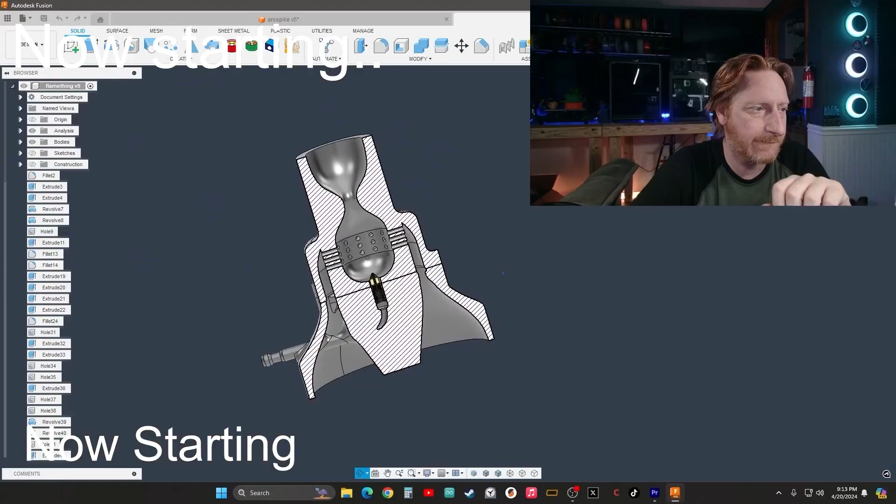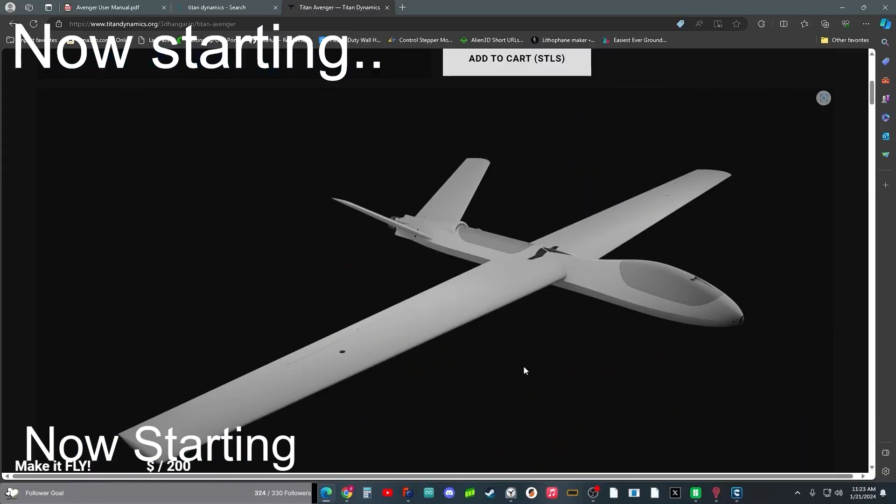Nozzle heats up and the plastic it flows, a creation takes form as the live stream goes. Heart of a maker with a tech-savvy show, designs in the making, see the hotbed aglow. It's shenanigans 3D on the digital stage, with each layer printed, he's the maker, the mage. Let's start the show, layer by layer we watch it grow, a twitch in time with shenanigans flow, chaos reigns with a fiery glow. Watch closely as the filament spins, a wild ride where the line between fails and wins. Accidental art when the plastic rebels, shenanigans 3D, he's breaking all the levels on the edge of tech, where the sparks may fly in the streamer's den, there's no limit to the sky. Every stream's a gamble, roll the fiery dice, pushing limits, bending rules, not one to think twice. Heartbeat pulses with each print he creates, while the chat's wild wonder in suspense they wait. Rising with the flames in the shenanigans game, printing out the future, no two prints the same.

We need fire, we need fire. I was watching the intro there, and I'm like, you know what, we haven't had fire for a while. We'll work on some fire, we'll try to get some fire for next weekend.

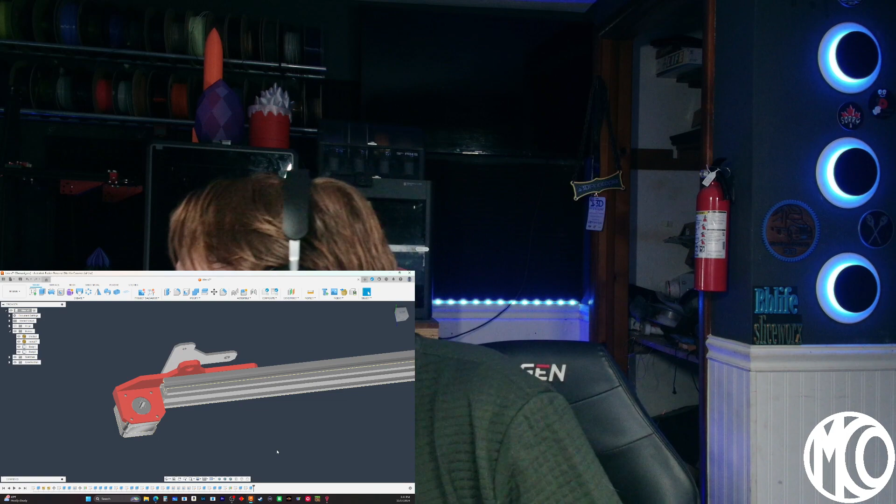That's gonna be the tricky part. So I know we can mount the one on the rail, but the other one is going to have to be a 3D printed adapter to mount to this. So that's something we're going to be working on during the week. I figured we'll work on the printer, do the printer stuff during the week.

Some point this week, we're going to check out the new flight simulator. That is coming out in a day or two. I think it might be out tomorrow, or it might be released Tuesday. I already downloaded it, I can't play it, but I already have it downloaded for the pre-release. So it's already downloaded, it's just not, I can't play it yet until they turn it on.

We're going to explore the new farming simulator. I'll do that sometime during the week too. But in the meantime, I want to design something. I don't know.

Your P1S is still down.

Oh, you have Hellbeast, you have a join at Formnext. Oh my God, I'd love to do a Formnext. I really would love to do a Formnext. They were supposed to do one here in April out in Chicago that we were tossing around the idea of going, and then it got canceled.

Yeah, hybrid, you know, I think the same thing too. It's like every time you get your hands on a printer, something happens. Something happens and it's like it breaks on you. Messed up the filament cutter sensor when it installed a new hot end.

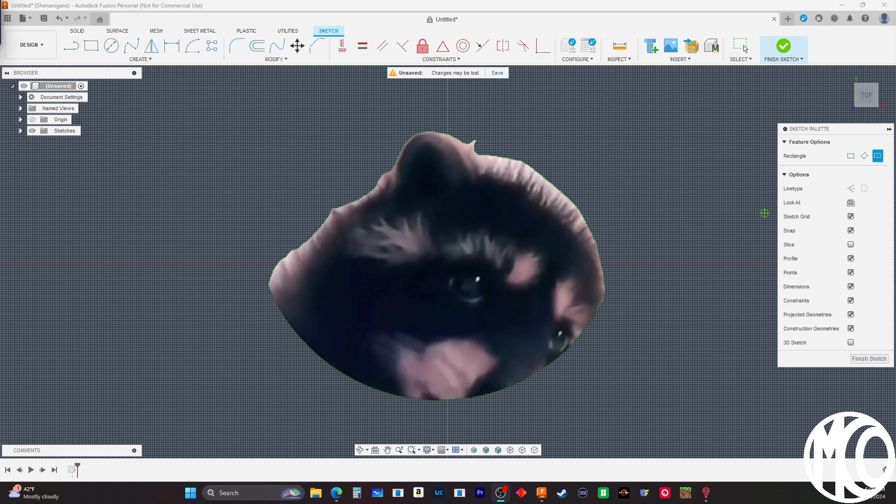Very intelligent and can solve problems and remember tasks for up to 3 years.

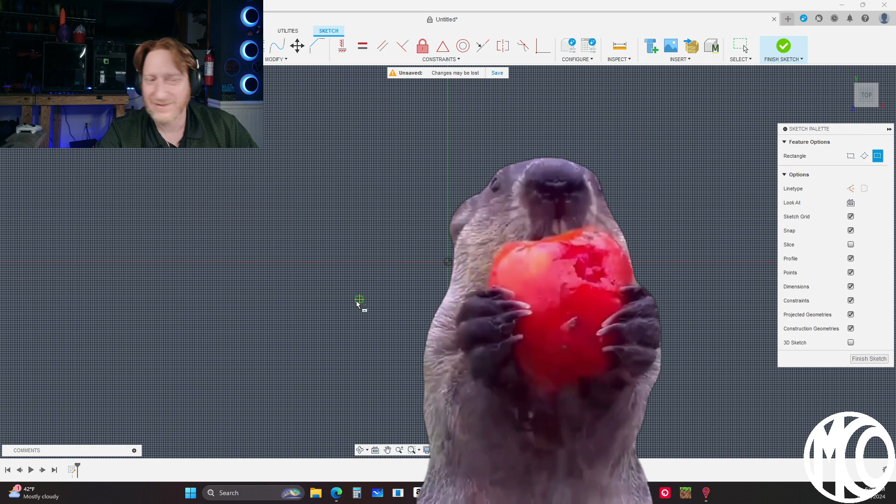That reminds me of the time we said Tech Cheaper is wearing headphones. I think because he made a comment about headphones, and we set off that little air raid siren. Yeah, I came across that Twitter the other, not Twitch, Twitter, TikTok video the other day.

So, what are the measurements on this again? For some reason, I think there already is a 55 by. I think there already is a card out for Santa. I'd have to double check. 55 by 90s. We're going to do it.

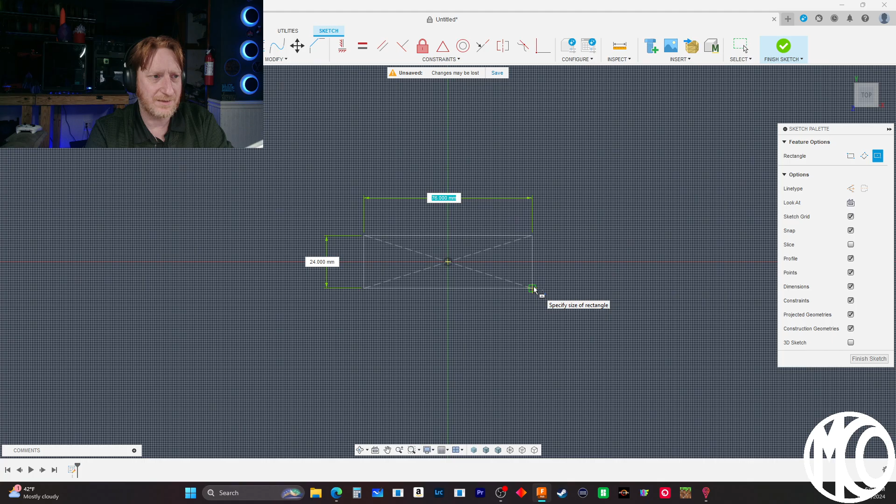590. And let's round off these corners. Oh, wait a minute here. Let's make this 54. I'm making this 54 because see how that is right there? I don't like that, that's just going to drive me absolute bonkers. So we'll make this 54.

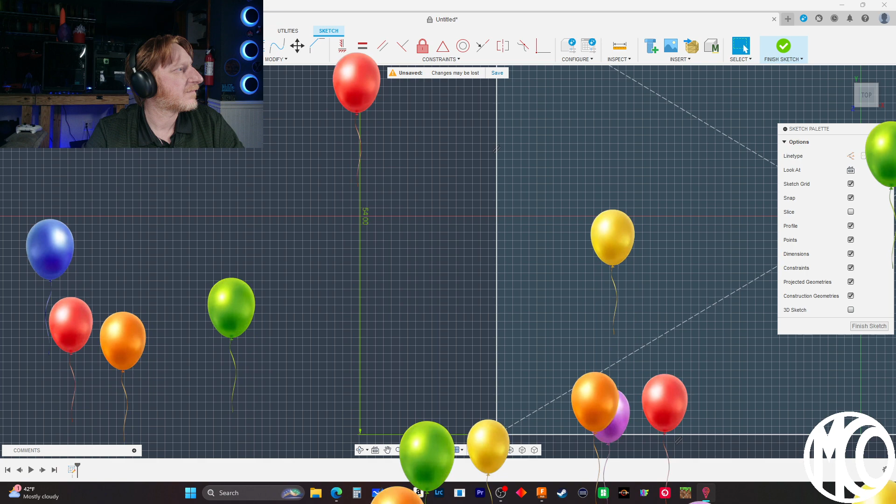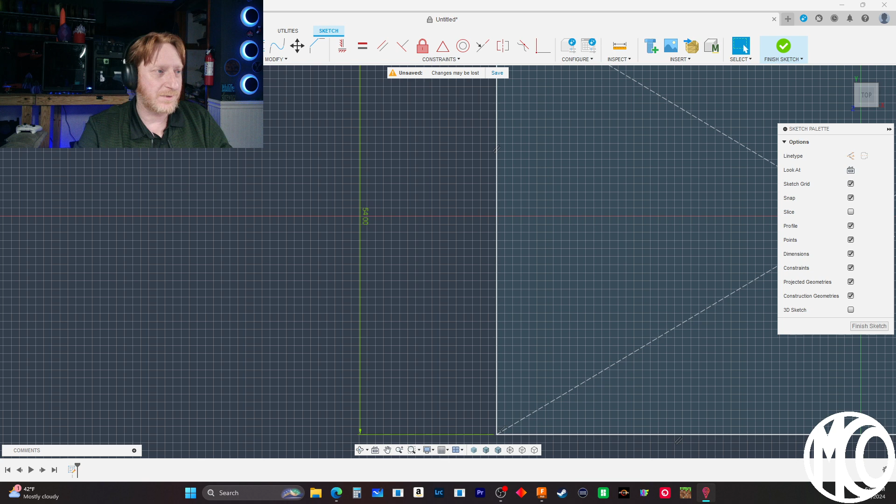That one was not supposed to be available to you, but somehow, nope. I accidentally left that one open for you. So yeah, that is not supposed to be a redemption for y'all. That is for my button down here at the Stream Deck, for when I find out it's somebody's birthday. I can press this button right here and activate it, which we already did.

We did it for the Forest. I can't remember her full Twitch name, something Forest. And I discovered that one is not a repeat, it's just a very long one. I didn't realize how long it was. Okay.

I just thought of something. What if we turn this? What if we turn one of these? Because of those noises.

Directly around corners. What? Apps with T, maybe Tinder? What are you talking about? Oh, Tinder.

So, a few months ago, I was playing around with Tinder. I had a little too many adult beverages that night. I was playing around with Tinder, and I completely forgot I did that. And I got a whole bunch of notifications the other day. I was like, what the heck is this? Oh boy, so I deleted that account.

It's like 4 millimeters. That will work.

Some of the things you get, some of the things you do, some things I do when I get a little too happy, when we get the wobbly pop.

There goes my crazy dogs again. I did something bad here, and I'm not sure what I did.

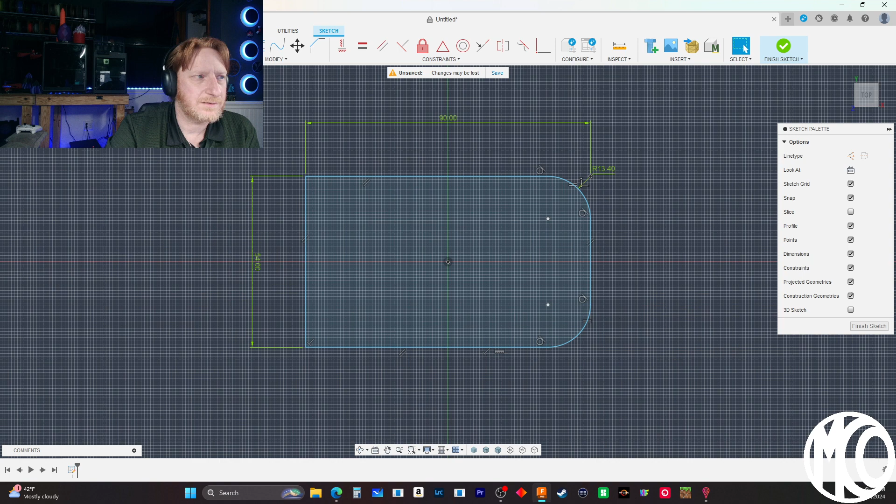Oh, I finished the sketch out, that's what I did. Because I want to use this. We're going to go on the inside, about 2 millimeters, I think would be ideal. Yeah, 2 millimeters, we'll go 2 mils.

You swipe right. Yeah. If you, I still have the app on here. Let's see what happens if I swipe. You said swipe what? I do have a blue sky.

I have to, it's all, I have to link it all. What happens if you swipe? It's a super like. If you swipe up, it's a super like. If you swipe down, it does not. It opens up their thing and accidentally super likes that person that's like 10 miles away from me.

I accidentally... yeah, we'll just put that back there.

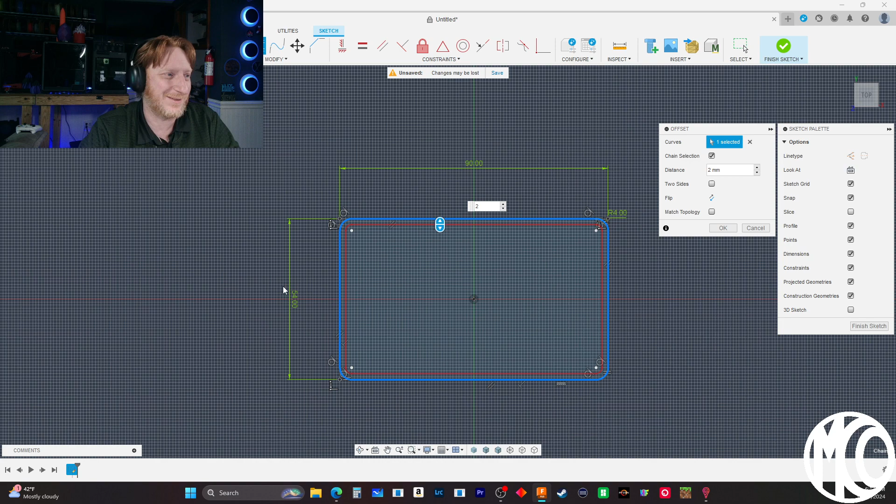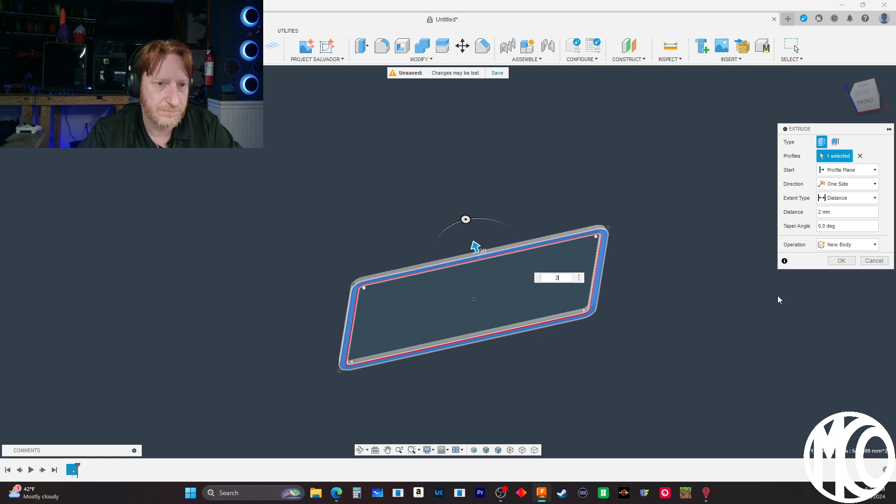All right, well I don't even know what we're doing in here. 2 millimeters. So that is our frame. Oh, I'm missing a gas can on here. Well, that's all right.

Yeah, I have a TikTok account. Twitch is my main platform. It used to be YouTube. YouTube was my main platform, but I just don't have the time to edit, so I switched everything over to Twitch. Twitch is my main platform, this is where you'll find me. I store all my Twitch VODs on YouTube. I do need to get back into doing some YouTube, I'll do a YouTube video here and there. And TikTok is just a fun thing. I can't remember the last time I did a TikTok video, but I'll be sitting here bored and all of a sudden I'll do a random TikTok video.

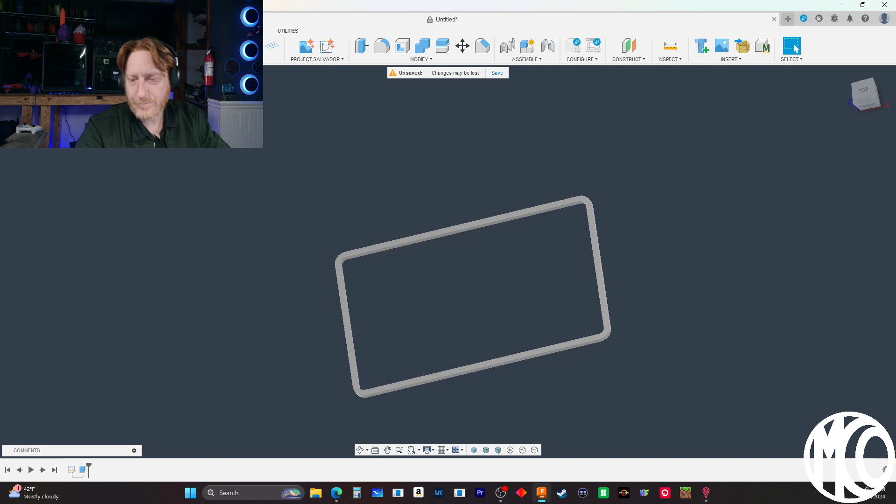Anyone use AliExpress? I ordered from AliExpress years ago, got my Christmas lights from them, but I haven't ordered on there for a while.

All right, so this is our main frame. It's gonna be about that size right there. So we need to do a Santa sleigh.

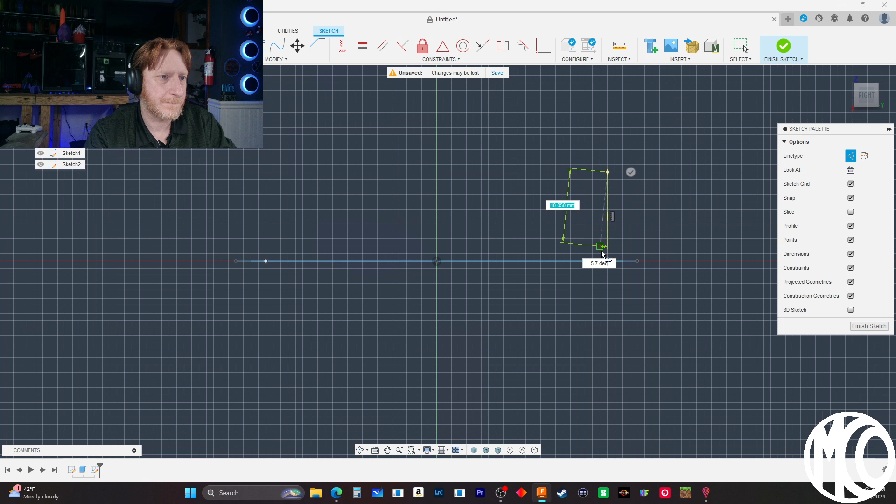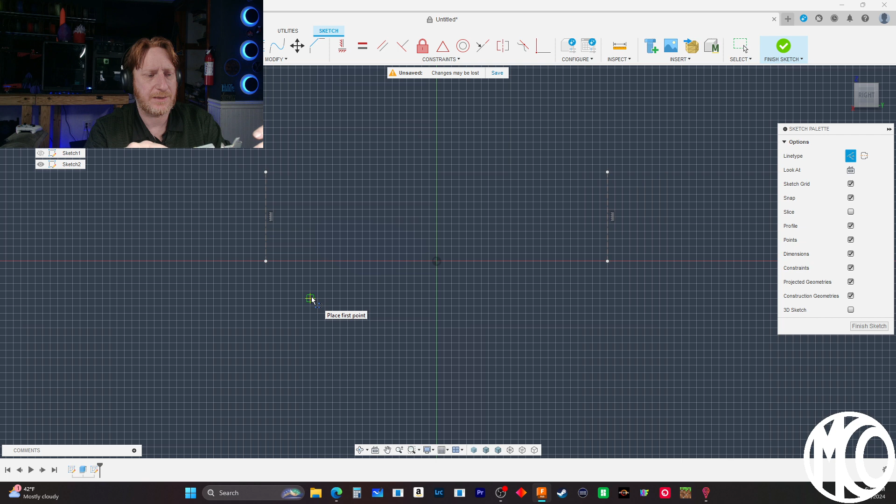How, you know, I guess we can start here. Let's get some dimensions in here. That's 12 millimeters. So that's 12 millimeters high. How high is this guy right here? That's 10, so we probably want that to be... we're gonna do something like 40s, in the 40s, and by 30 — you probably want to do at least 40 by 30. We got to think about how this is going to print.

You like to support Chinese people? I like to support everybody.

Yeah, I just haven't really played around with it too much. I'll get stuff from time to time.

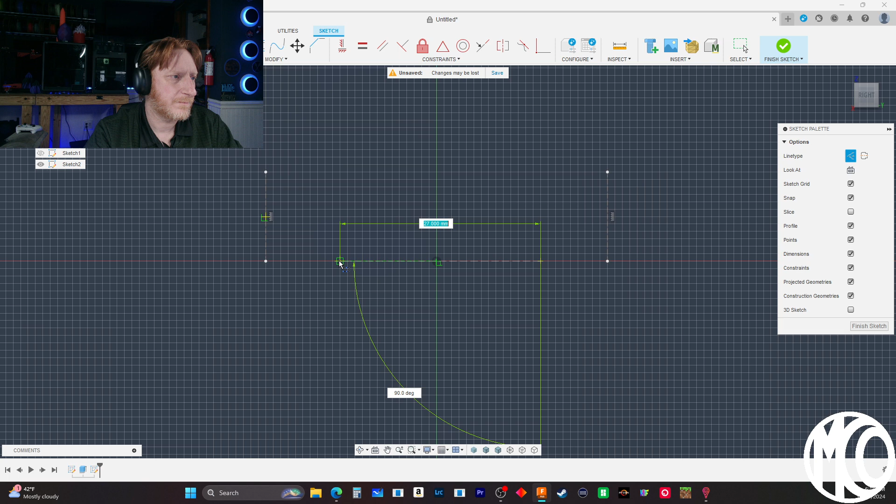We gotta think about it, I'm picturing how this is gonna print. So we're gonna print the sleigh upwards like how this is, but we got to make sure that we print it with very, very little supports. I don't think we want to be printing supports on this. So if we do something like this, and then let's bring...

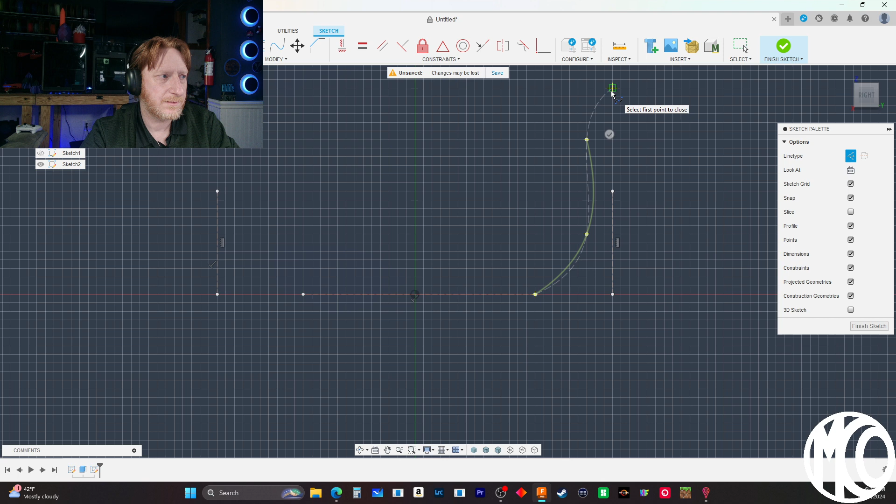You gotta understand, I know there's plenty of designers out there that fully understand what I'm talking about, that you got to be mindful of people that don't have top-notch machines. I shouldn't say top-notch machines — what's a top-notch machine? A machine that works, right?

When I design something, when I make something, my whole thing, like this tree here, the whole thing is I like to make stuff where it's accessible for everybody to print. That's why you don't see me doing multicolor prints. Or if I would do something like that, I'd make an option available, like look at the stuff that Build-A-Robot makes — that can be printed on a very simple machine, or you can go and have it as a multicolor print, right?

No, their models — him and his wife — the models that they make are very, very flexible. And no pun intended, yes they are flexible, but the machines that you can print their models on are very, very flexible too. And that's the way I like to keep my stuff.

When I try to do something like that... because I don't publish anything. That's gonna change though.

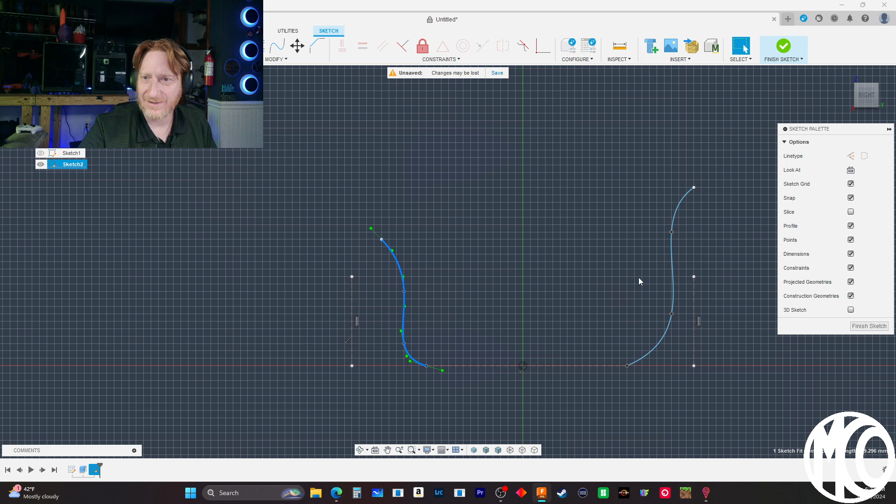Oh, I'm sorry to hear that. What? Oh, that is crazy. I hope your son's... I'm sorry for your mother. Yeah. And I hope your son is a lot better. You know, your other son does pop in. Oh, my heart goes out to you. You'll definitely be in my prayers. You've always been in my prayers.

In the patient program now. All right, good. Yeah.

Craziness, right? All within 2 weeks. I would definitely say October was a shit show. Definitely, I would say that. I couldn't even imagine, I can't even imagine the loss of one of my parents. That would be devastating to me. And something happening to my son, to my child, that would completely devastate me as well. That's crazy. I know the feeling about the child, I know that for a fact. 3 months after my son was born, we weren't sure he was going to survive the trip to the hospital. So yeah, that was a nightmare for that first year of him. But yeah, loss of a parent. Ooh. But hopefully it will turn. You can't replace something like that, but hopefully it gets turned around on you.

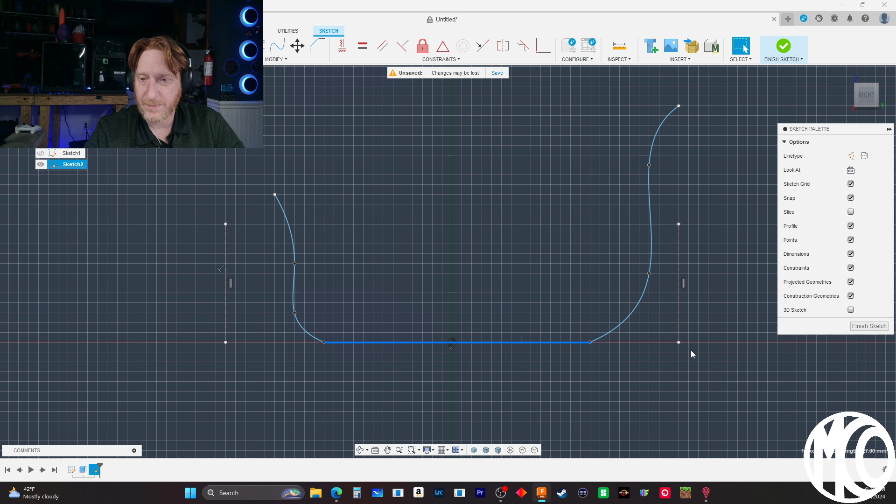Dad has 2 kinds of cancers. You're preparing for him, I'm sorry. You made your peace. Yeah. My son's been talking a lot lately about stuff like that, and I just tell him it's part of life. You know, you live it, you live your fullest.

Kidneys and liver were failing. Well, it was just antifreeze. My God, that stuff is - I watched a thing about antifreeze, how toxic that stuff was. And you know, I'm an old school mechanic, I guess, or not an official mechanic, but I grew up in the backwoods on farms and stuff, and we weren't protected. Heck, just about 2 years ago - was it 2 years ago? Yeah, something like that - I had an antifreeze line break on me, and I was underneath my truck trying to fix my hose, and I was completely covered in antifreeze from head to toe. My clothes were saturated in antifreeze, and I just continued working the rest of the day like that. That stuff absorbs into your skin and everything else - maybe that's why I'm so messed up in the head sometimes, I can't think straight. I was always taught on the farm, if your hands are greasy, you went over to the gas can and poured a little gas on your hands to wash them with gas.

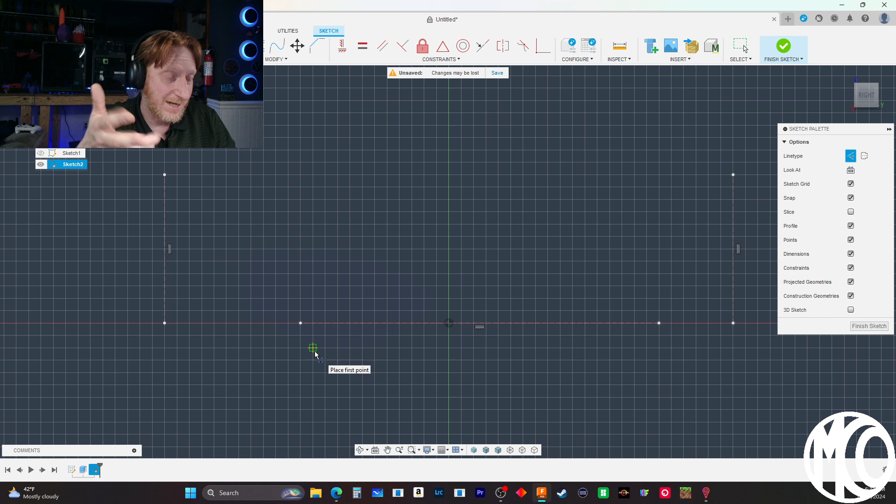Oh yes, that definitely would be a relief. Three strokes, holy moly. My mother was telling me that she was researching strokes the other day because she said she was laying in bed and kept seeing flashes of white. She freaked out and started reading about it, and my mother is the kind of person where, well, if you die, you die, it's your time. She's all about that, she's that kind of person.

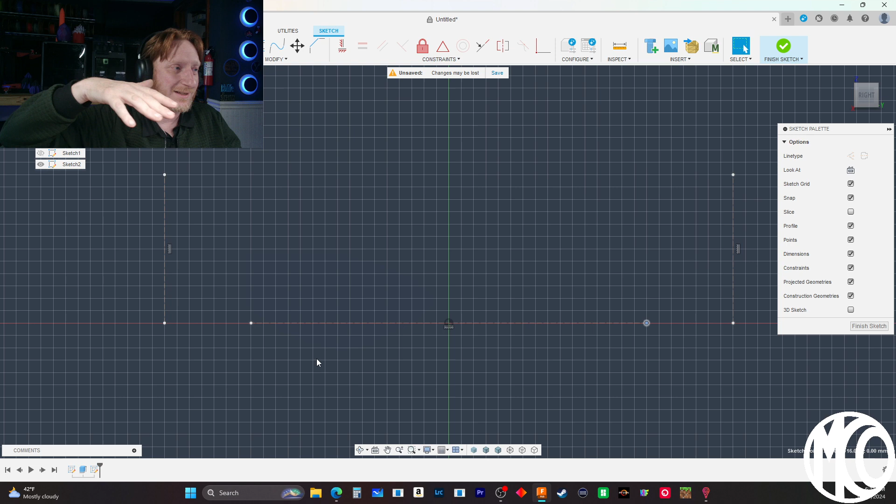But it turns out she had her phone notification for Messenger on, where the flashlight would light up, and her phone would be sitting on the nightstand. Every time my sister or I would send her a message at night, it would light up the whole room, and she thought she was having strokes, but it was just her kids. I was just like, wow, yeah.

You purchased a commercial laser. I really want a laser. You did that when you had a work phone. I would so love to have a laser.

I thought about making my own, with some of the extruded parts I have. I thought about making my own.

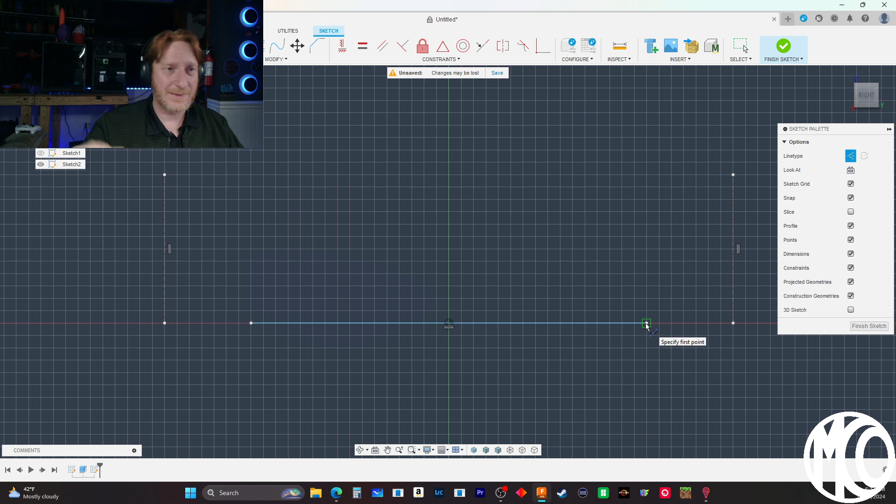I'm not really sure why this still keeps... oh crap, I deleted it. Overhangs, that's what I was talking about.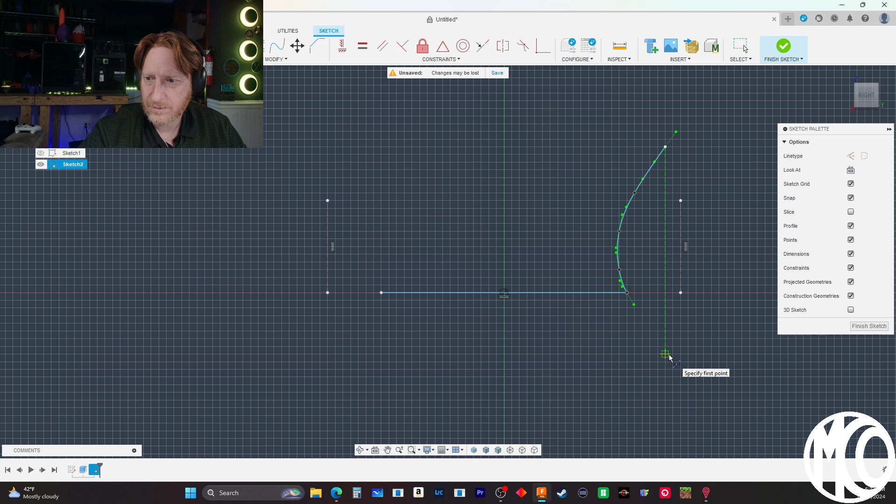I have the F1 already, I got the... Oh, you got a CO2 one. I can send you the focus one if you want. What? Send me the one you have? That one, to the stream? That would be awesome, I could definitely use that on the stream.

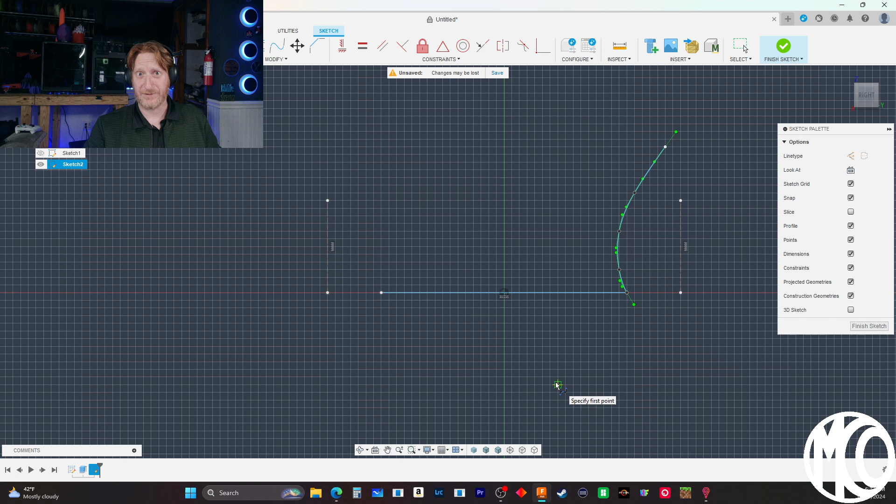Oh, subsector, I got myself a CNC machine. Yeah, check this out, we've been doing some upgrades here to the channel. Let me pull this out here real quick.

Yeah, so I picked up a CNC that we are converting at first to a 4-axis, and then it will be converted to a 5-axis. We've already used it, or well, we played around with it. It's nothing fancy.

Oh, and the IDEX, the one that I had to purchase because of you. Yes, I do, I remember that. The IDEX is currently down here beside me, but that runs Klipper now. Yeah, the one that you bought and then showed off, I'm like, oh, I gotta have that now. Yeah, so I blame you for that, for me having that one.

Yeah, that's sitting down right here. It's down here because we're doing some crazy stuff. The CRM4, that large printer that I have from Creality, they call it their industrial printer, that hasn't worked for like a year. So I got tired of dealing with it.

So we're converting it to an IDEX. We've actually been working on that this week. You have the 8 now. I like the 8. So yeah, we just got the extruded aluminum in, this came in on Friday or Saturday. Friday. So this is the new bar.

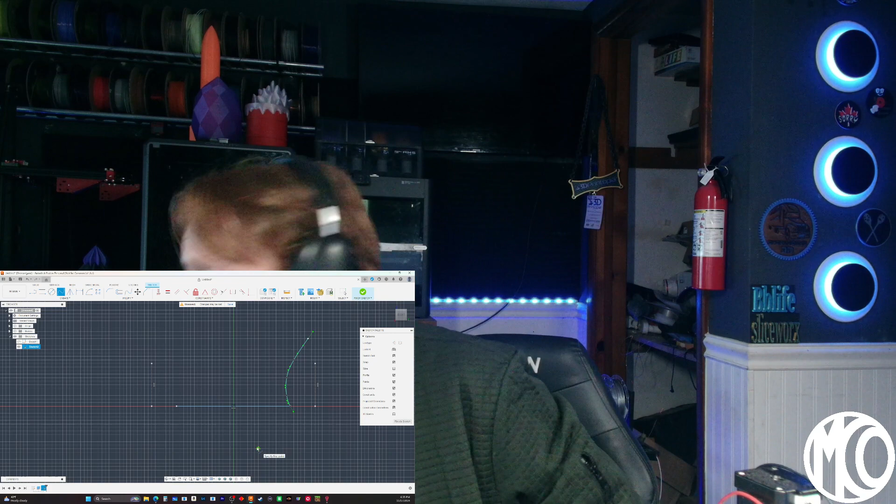We are converting the Creality CRM4 to an IDEX. We have the board for it already. We are going to be using the... I'm so happy that you popped in here, because you and I think the same. So we got the board. This is the board that's going to be going on the new IDEX that we're building.

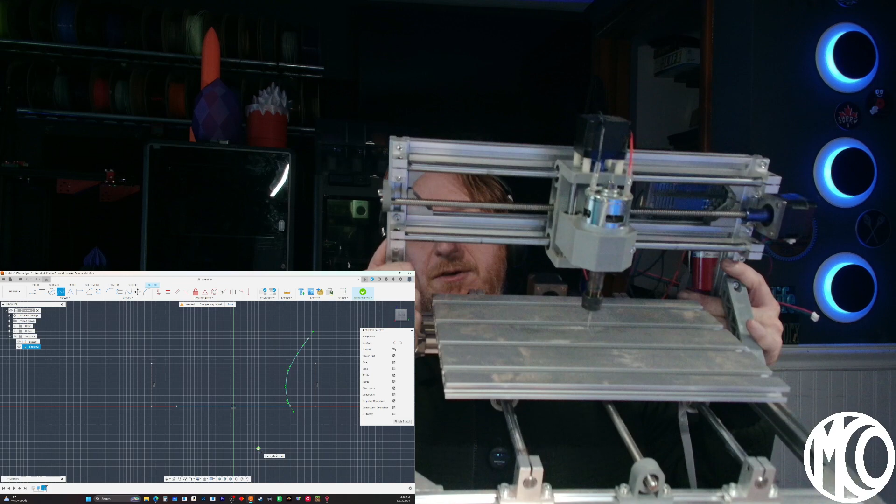And then the CNC that we got for the channel, this guy right here, nothing fancy. I went with this model, one, because it was cheap, I only paid like 160 total for this. But I went with this particular model because all the extruded aluminum... it's all extruded aluminum.

You see all the other ones that are under 200 bucks, all have that side plate on it. This one's all extruded aluminum, so we can highly modify this, and this will eventually become a 5-axis router or CNC mill. We put this together on a stream, it wasn't too bad, it does work. The only reason why we really haven't done much with it is because I've got to learn CAM.

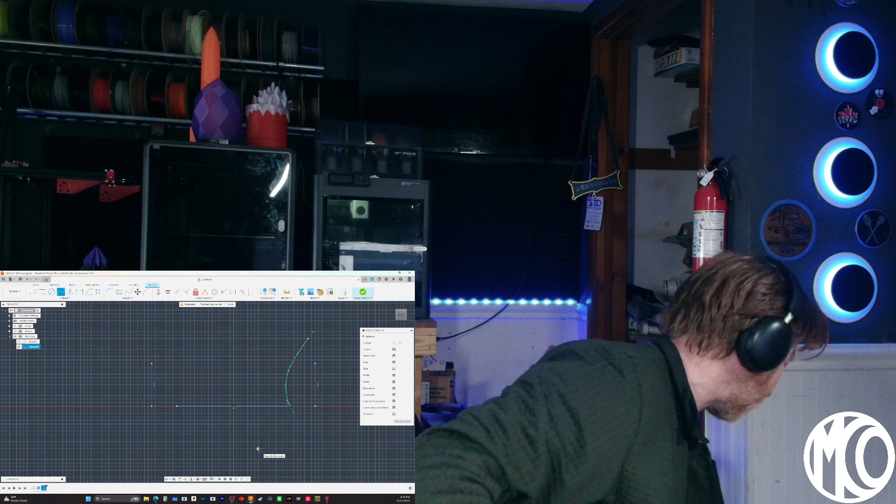We have printed stuff with it, or not printed. We have cut some things out with it. Let me get my light on here.

Do I have that over here? I might not, I might have. Oh yeah, I do have one of them. This was our very first thing we cut with. Oh no, this is our second thing we cut with. The first thing we cut out was just a star. So yeah, this is our second thing that we cut, it's just my son's name and a train right here.

And we did cut aluminum with it. We cut a star out of some 6061 aluminum. So we are capable of doing all that.

Same reason you have? Yeah, I played around. I tried playing around with CAM, and it's not clicking. But we'll get there, we will get there. And the other thing I've been playing around with lately, going back to Blender again, playing around with Blender.

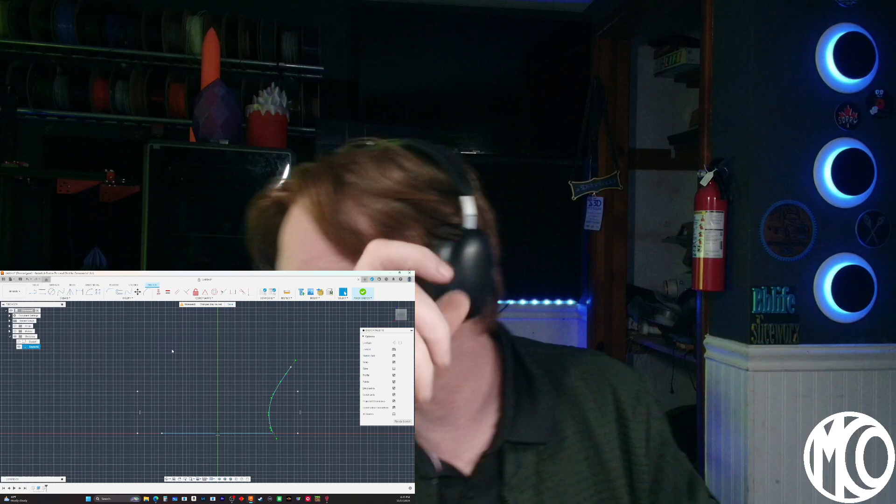And we did highlight him here in the show that one day.

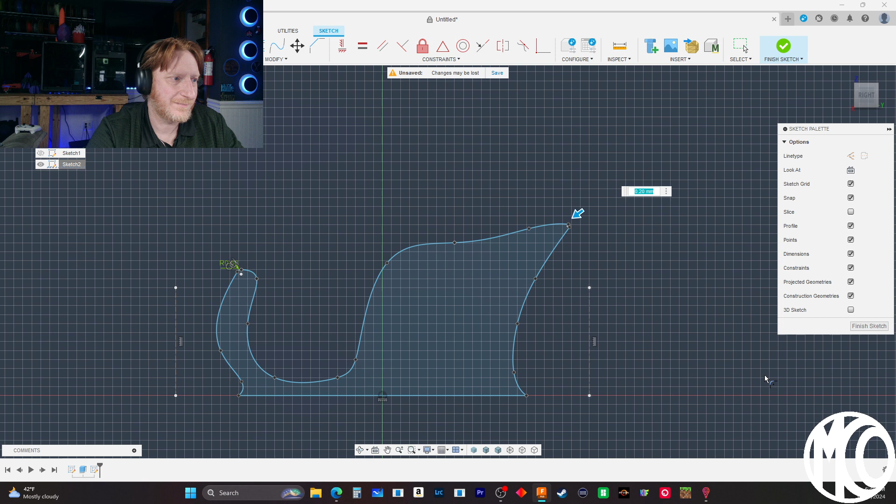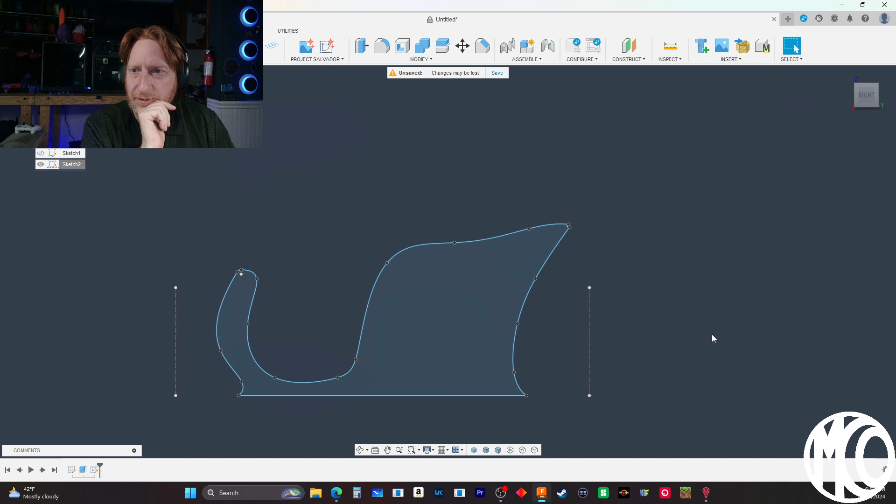Yes, Subsector, I'm looking so forward to you streaming again. I miss your streams, I miss you.

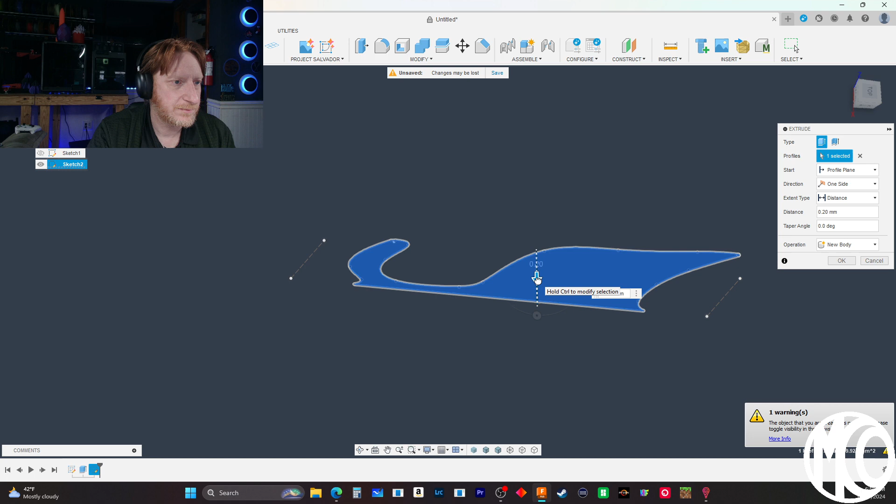All right, so if we take this and let's do -- cancel this. Why are we not -- what's not visible here? Something is not visible here. Bodies, that's what it is.

So let's make this 3 millimeters. Will 3 millimeters work?

Oh Subsector, I became a Moko. I'm part of Moko, Team Moko now. Yeah, a lot has happened.

3 millimeters, no, we're gonna take this to 2 millimeters. So this is just the start. We'll play around with the design here in a little bit, but that is the start.

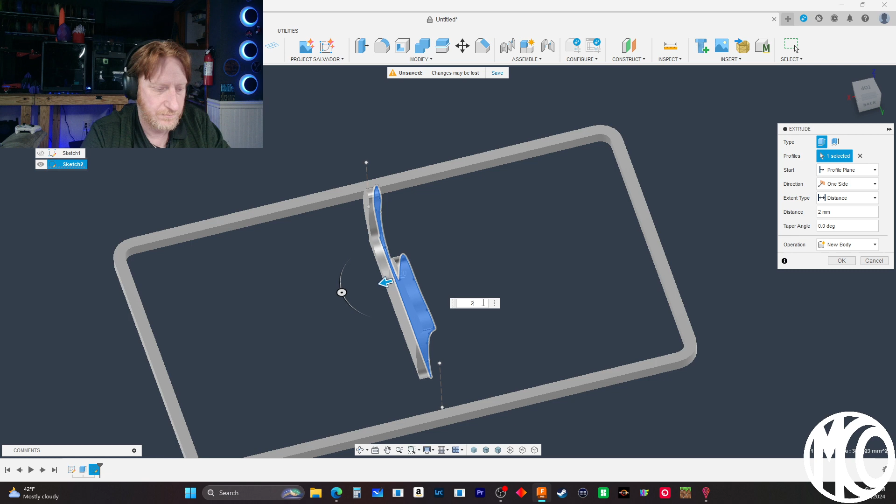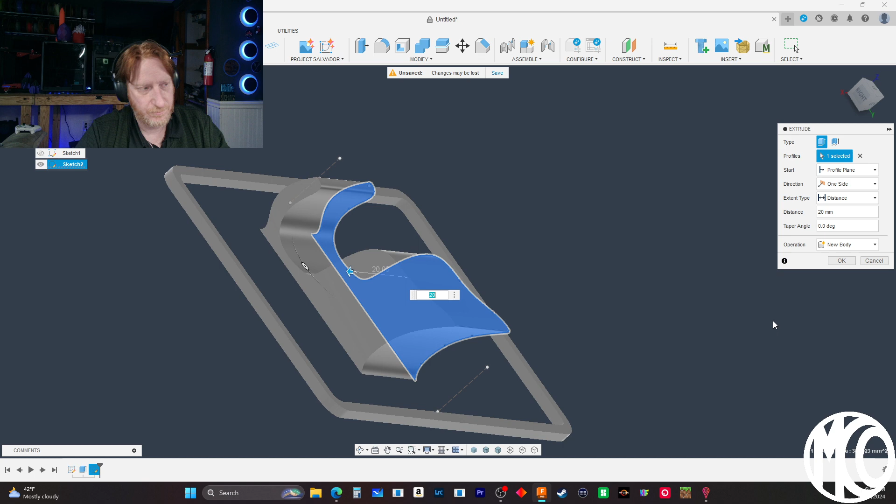We need to do something. How big do we want to make this? Let's say 30 millimeters. Oh, that's too big. Let's back this up and try 20. Maybe 24? We're gonna do 20. What do we got going on here?

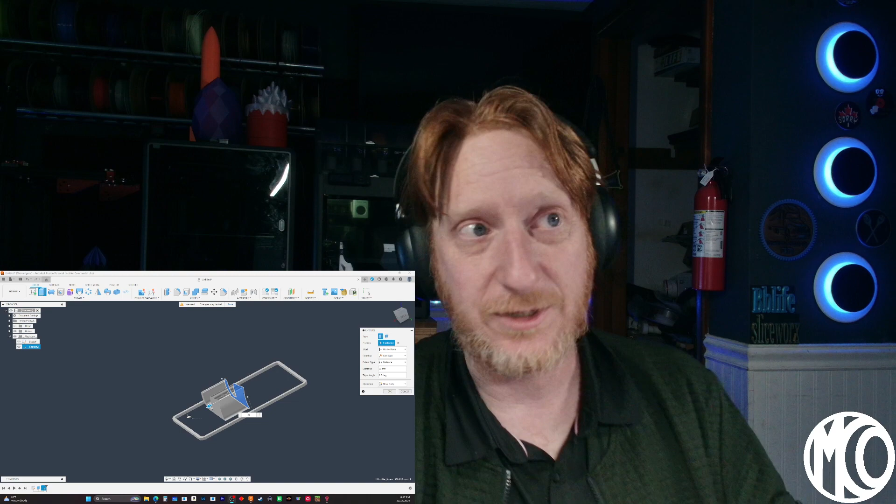Ramon beat me to it, but make sure you head over there and give her a follow. Her and I are really into electronics, and my wallet is a lot lighter because of her - watching one of her streams is the reason why I got that SV04 IDEX. I kind of like to rub that in to her every time I talk to her about it. It was a great purchase - I love that machine, definitely love that machine. I'm looking forward to when you start streaming again. I loved your streams. Loved it, loved it.

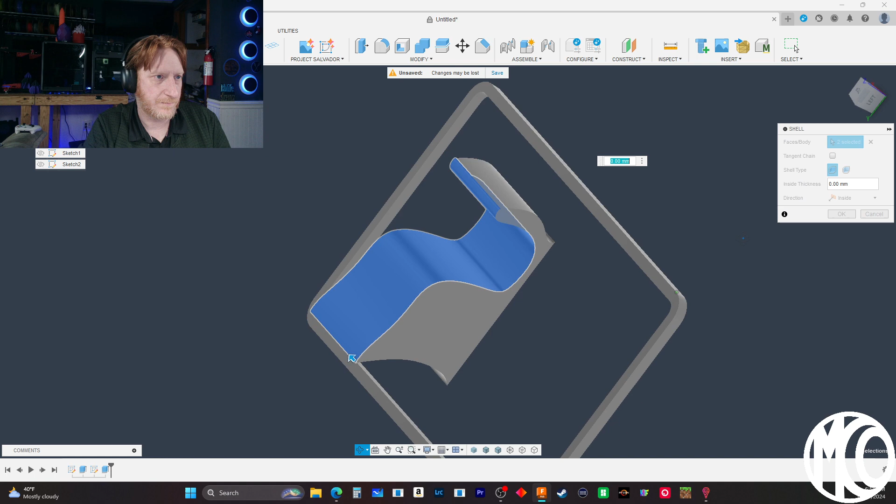K2 Kevin, how are you doing my friend? If you all know, K2 Kevin's got a bunch of new models coming out. I haven't looked at them yet, but I keep getting notifications that you've released more models.

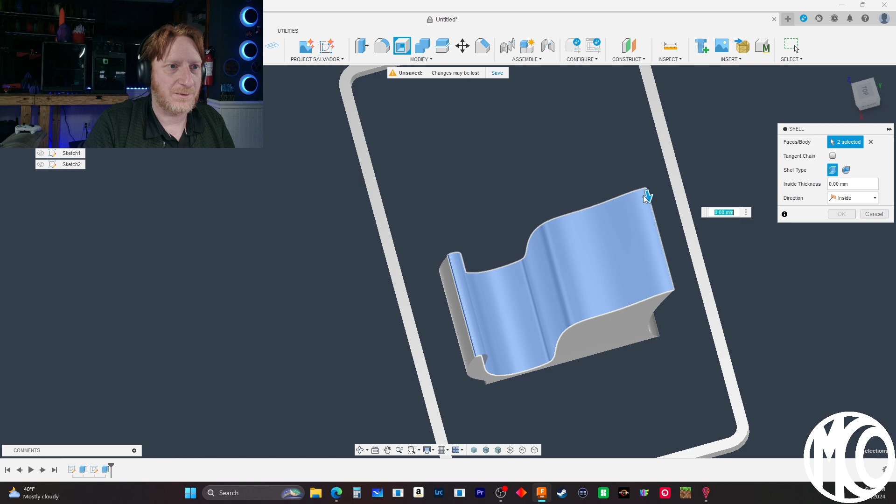I've been this weekend - except for tonight, I've been kind of... hold on, we got something over here.

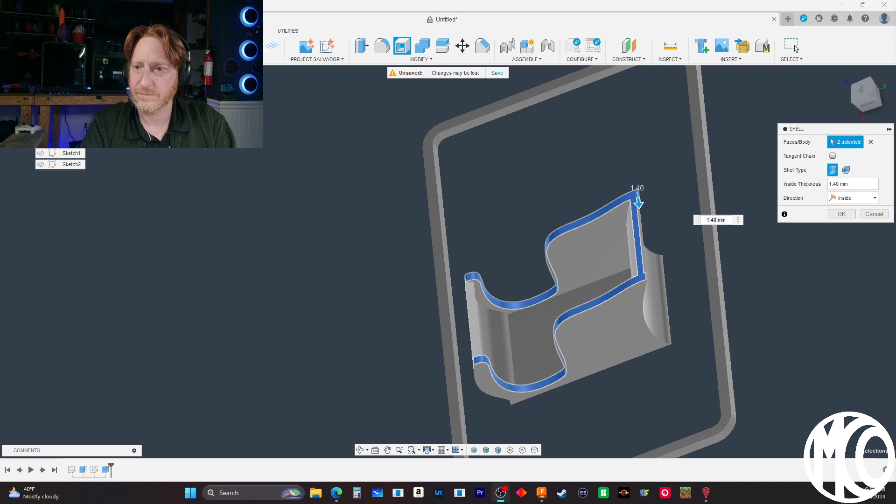You always have something new on the list, I know, right? I love your models. This weekend has been kind of an off weekend - it's kind of just a relaxed weekend for me.

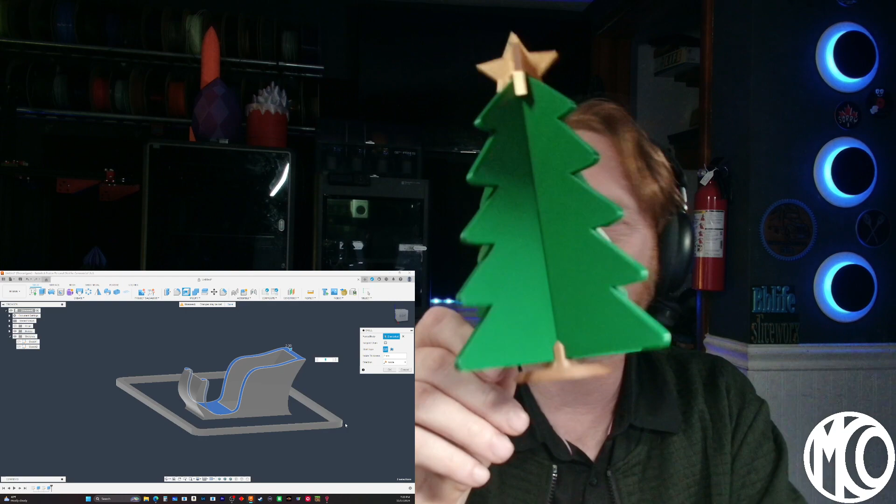We are making it. I will be uploading this - this is a new model I just did today. This will be going up, I'm not sure where, I'll probably put them across both platforms. This is my little Christmas tree model I made today, and it all comes apart and slots together. And that little base is optional, you can hold it like that if you want.

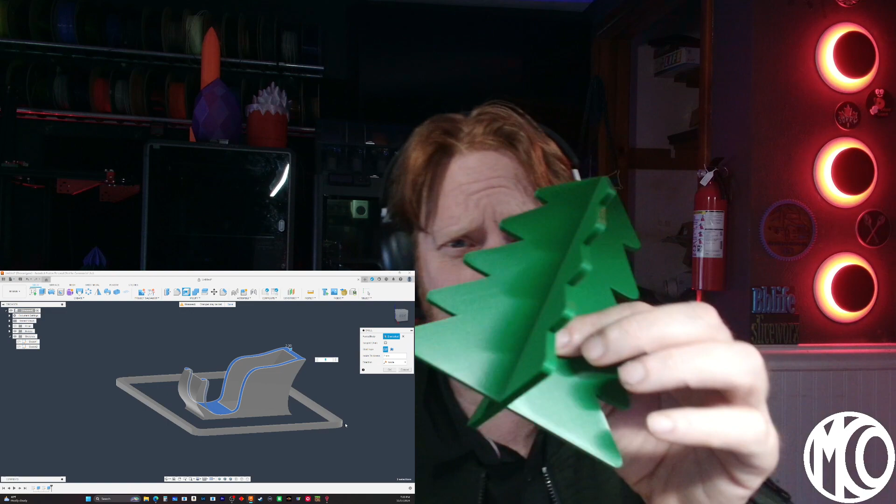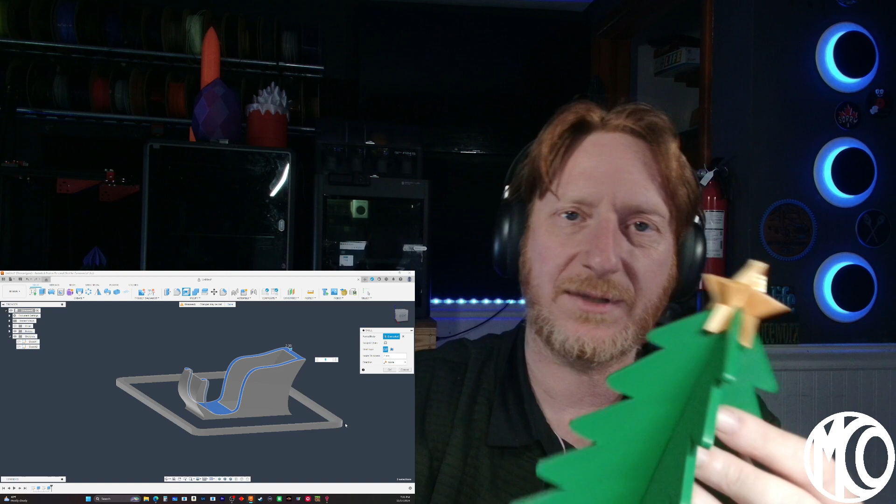We will have that available here over the next week or so. I don't want to put it up too soon, but I don't want to put it up too late either. That's something I still got to figure out.

Right now what we're working on is one of these little kit cards. This is the Jeep from this guy right here, that little Jeep. He's got several of these out, but we're making one for a Santa sleigh.

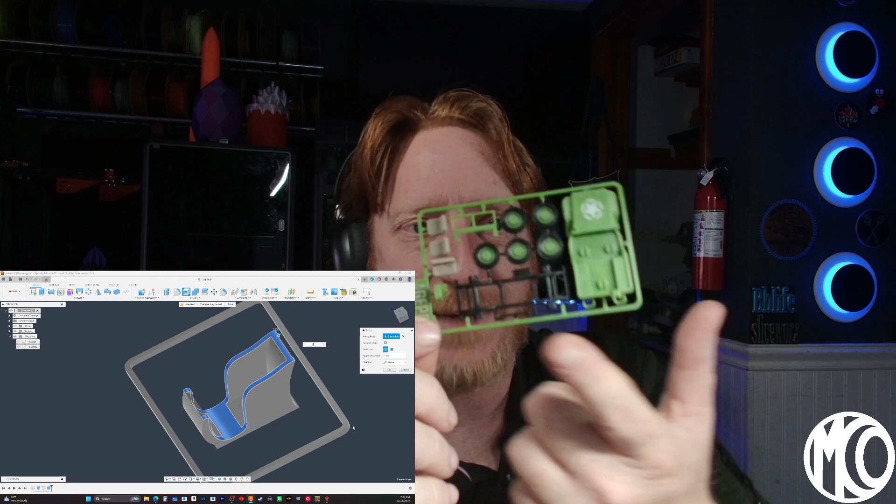I guess we could do some reindeer on here too, huh? Never too... you know me.

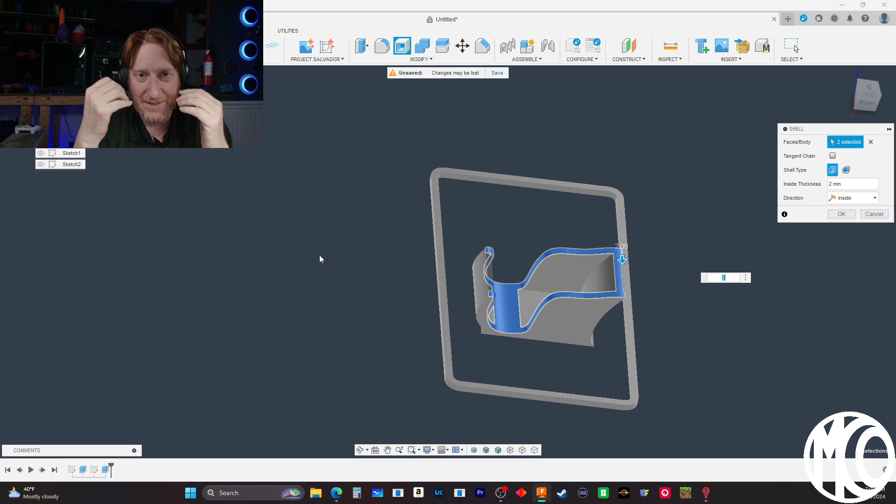I've always been the person where you don't do Christmas stuff. You don't do Thanksgiving stuff. No, you do Halloween in October, then Thanksgiving stuff in November. You don't do Christmas stuff until the first day of Christmas, that's when you do it. But for some reason this year, I don't know what it is, I've been doing Christmas stuff here in the middle of November. We've already done a few Christmas things.

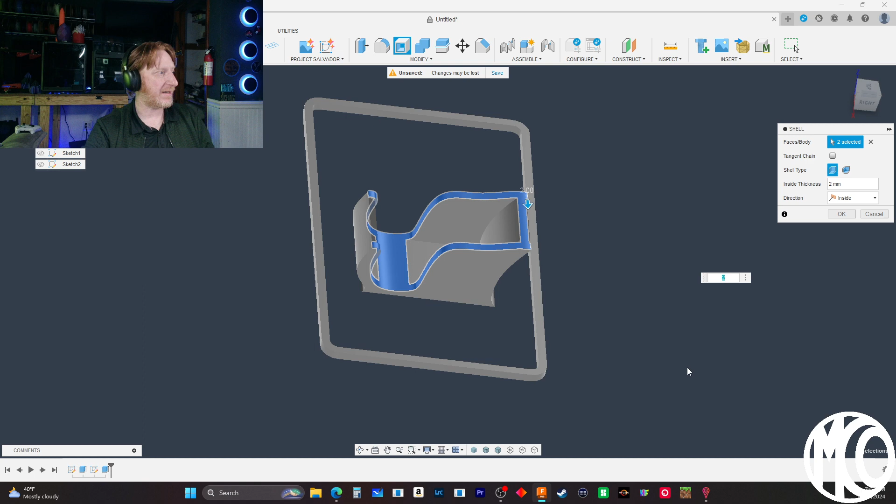Oh yeah, the painted wood. I know what you're talking about, the painted wood ornaments now. Wonder if I have enough wood filament for that.

I think I'm happy with that, to be honest with you. Just okay this.

Hello John, my friend. How are you doing today?

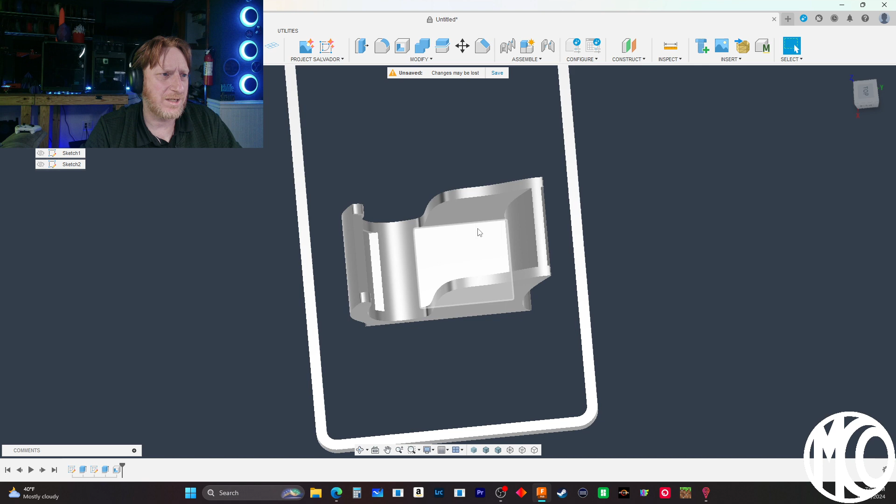We could have this sleigh here. We need to do the runners, so we do the runners, and we can probably do like 2 reindeer, where they slot together like the tree. We can also convert this tree into a slot into one of these little cardstock thingies too.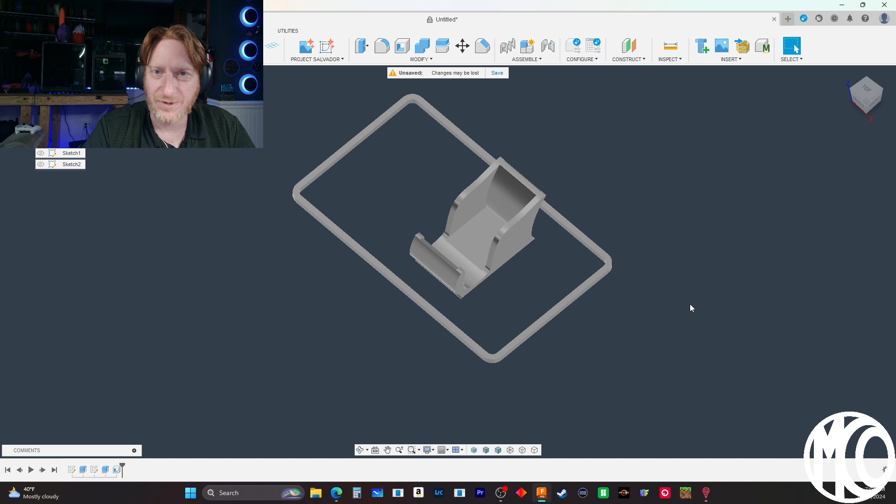I was gonna play some Forza today with my son, but we ended up playing Coast Simulator instead.

You've been tinkering around with Second Amendment stuff. This would have been the weekend for me to do it. We were up at camp, but we didn't - we ended up having to get everything prepared for snowfall, making sure all the solar panels are all nice and up, and then making sure we had plenty of wood, so we cut down 4 trees.

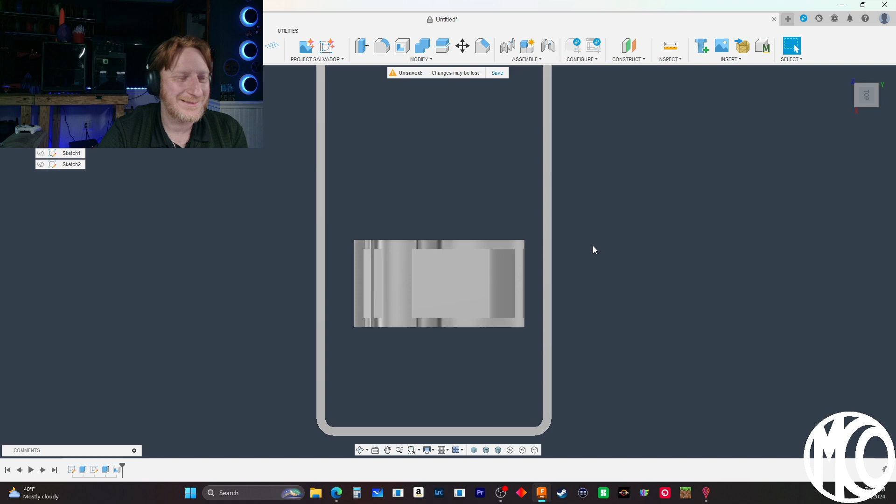Our yearly friend range day is in 2 weeks, so I was preparing for that. I haven't bought brass in a while, I don't even know how expensive it is.

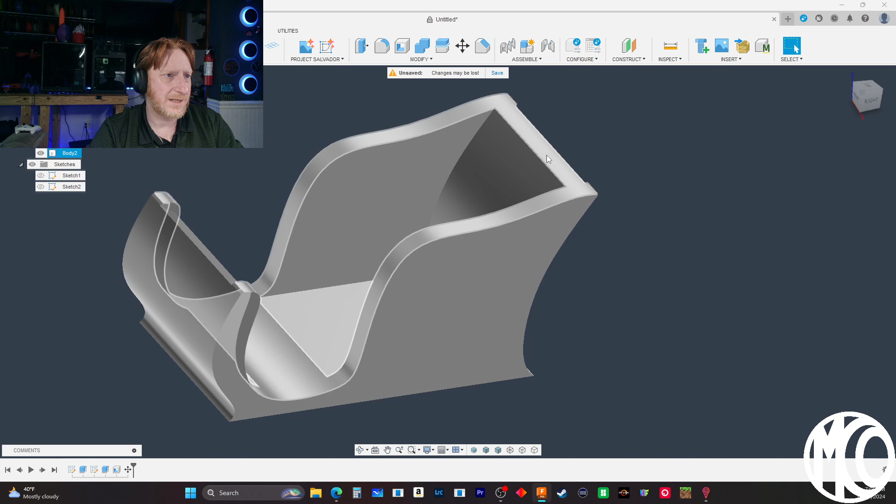Let's move this guy down here. I tell you what I want to do - I want to hit OK. We're gonna test this body out. I want to see how well it works before I do any modifications. I want to drop this part down just maybe 2 millimeters, because I want this railing to be highlighted. Same with the front - I want to drop the front down just a little bit so we have kind of an outline, and then bring this out.

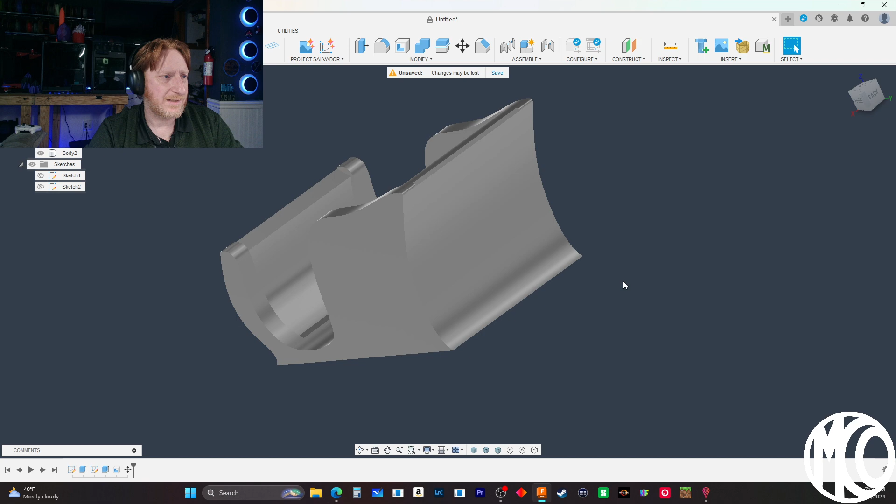With this too, bring that in, maybe a little bit, and we'll have that nice little outline there. Then we need to do our holes here, our square holes, so we can do our sled runners, so they fit up in place. And then we'll do like 2 reindeer.

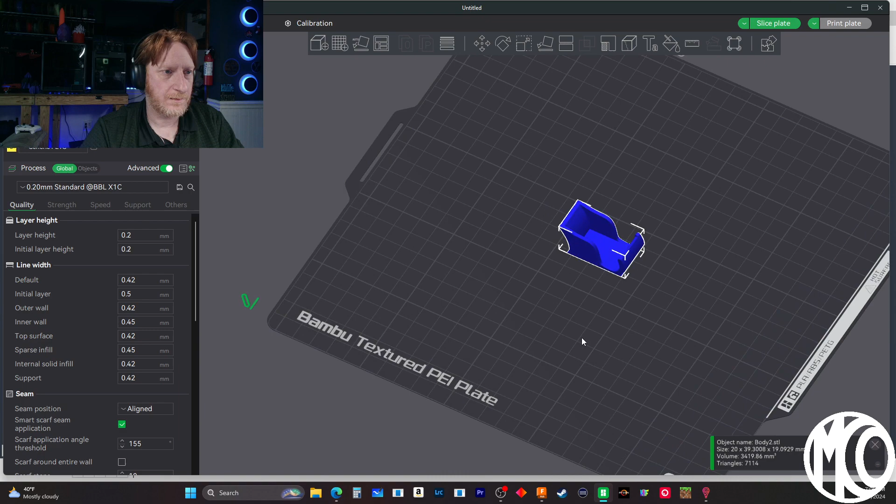But let's check something real quick. We'll open it up and see how well this is going to slice the way it is. If it slices fine without supports, then I'll go with it. Oh good, didn't do it. Let's slice this up real quick.

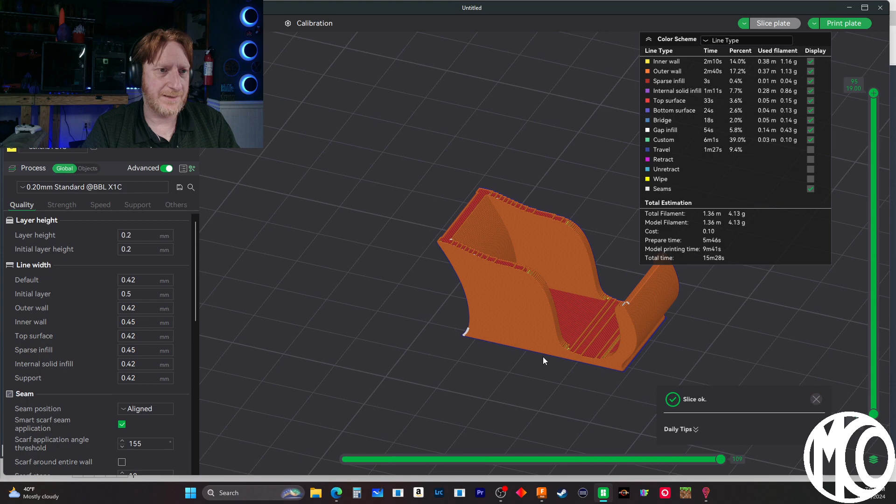That's nice, we don't really have any. Yeah, that will work, that will work out great. Cool, that will work out great. Awesome.

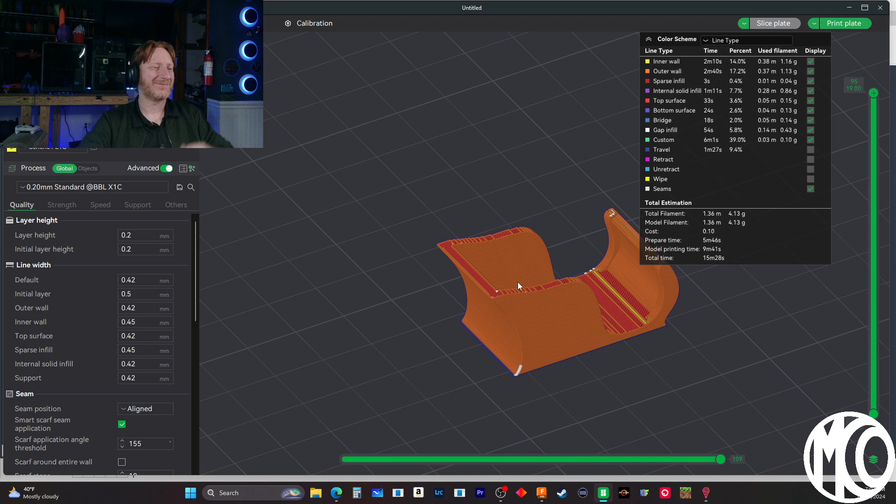You're forever... it comes in waves. Yeah it does, definitely comes in waves.